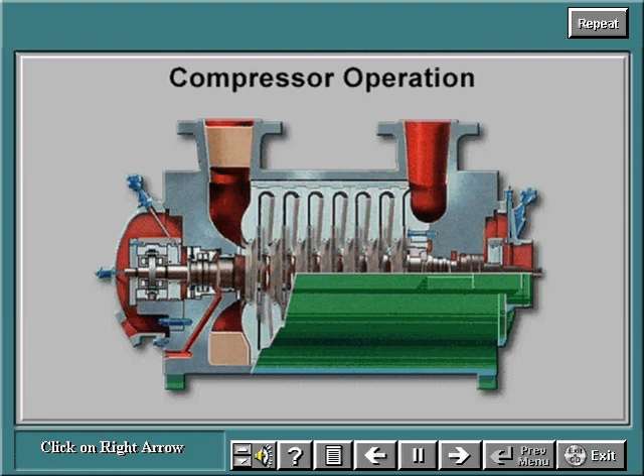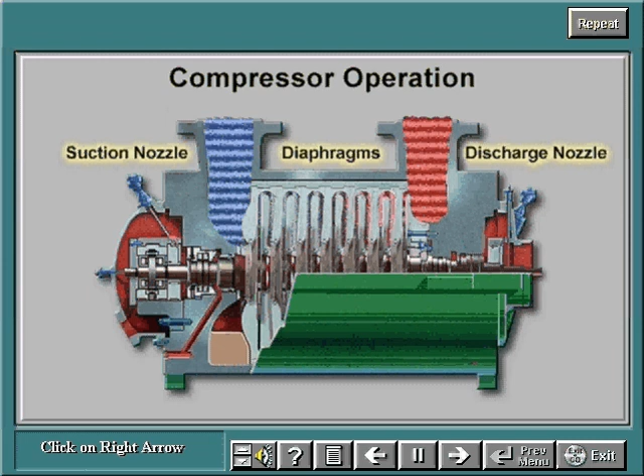In a centrifugal compressor, a continuous flow of fluid increases its pressure by means of energy given by impellers arranged on a rotating shaft. This type of machine is composed of an outer casing, which contains the diaphragms and a rotor. The rotor draws gas from the suction nozzle through the impellers, across the diaphragms to the discharge nozzle located on the opposite end of the compressor.

The major components of a centrifugal compressor can be divided into two functional areas. The first functional area includes the stationary components consisting of the casing, the inlet and discharge nozzles, the inlet and discharge volutes, the inlet, intermediate, and discharge diaphragm sections, the shaft end seals, the journal bearings, and the thrust bearing.

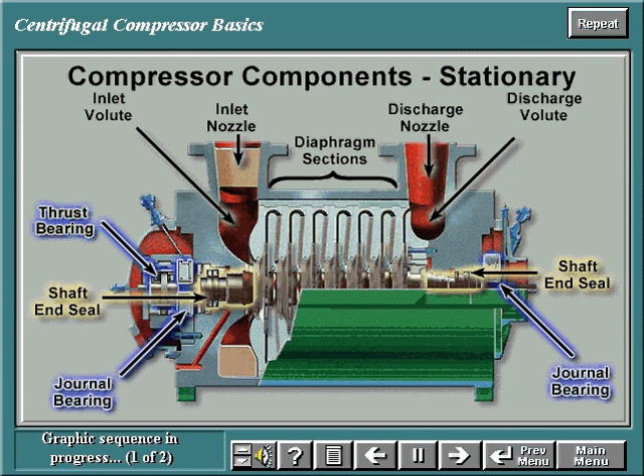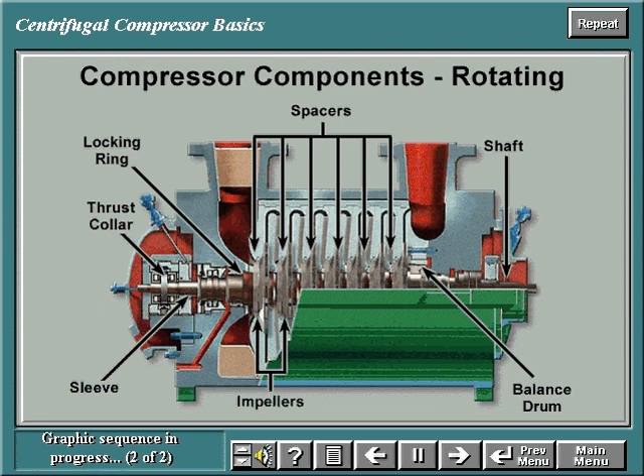The second functional area includes the rotating components consisting of the impellers, the shaft, the balance drum, the spacers, the seal sleeves, the thrust collar, and the locking rings.

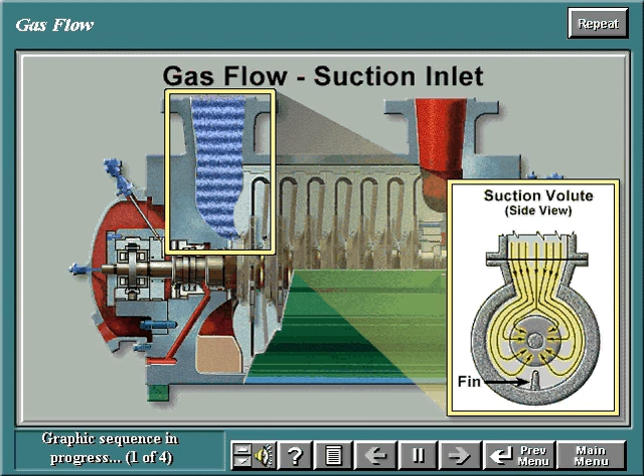Gas flow enters the inlet volute of the compressor through the suction nozzle. The volute ensures uniform distribution of the gas around the eye of the impeller. In the volute, directly opposite the suction nozzle, is a fin that reduces gas turbulence and prevents recirculation within the volute itself. From the inlet volute, the gas is then drawn into the eye of the impeller and is discharged.

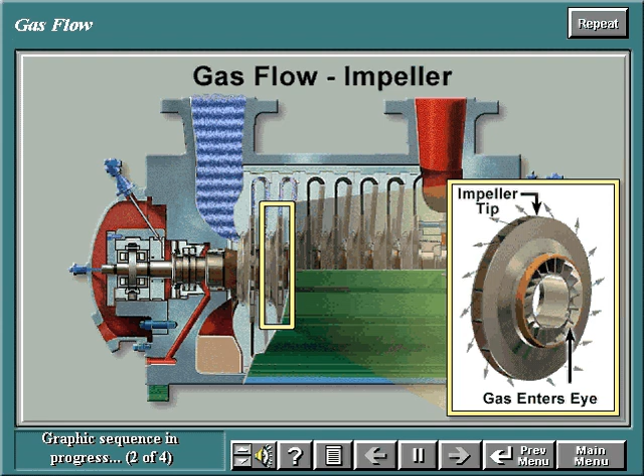Radially at a higher pressure, temperature, and velocity from the tip of the impeller. The impeller contains blades that convert the mechanical energy of the shaft into gas energy. This energy can be measured in terms of pressure, temperature, and velocity.

The high-velocity gas flows from the impeller into the stationary components downstream, whose surface defines a diffuser. In the diffuser, part of the gas velocity is reduced. Following the diffuser is a return channel that brings the gas to the eye of the next impeller.

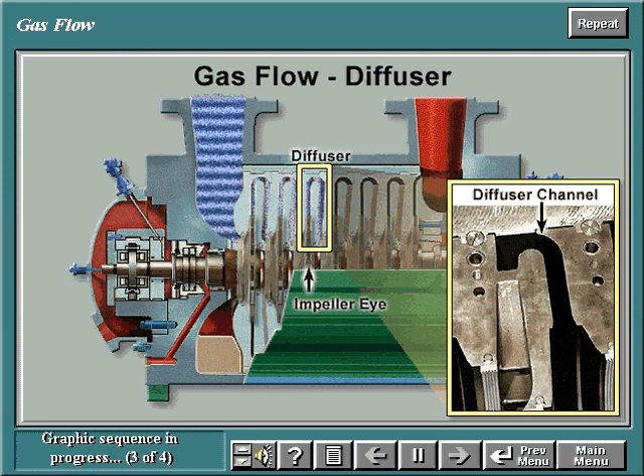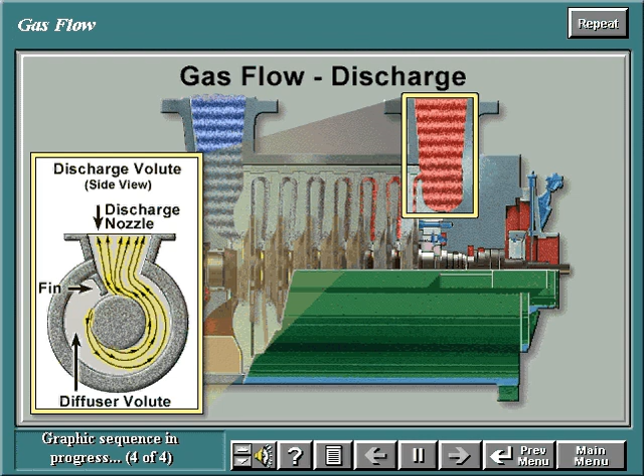Upon leaving the last diffuser, the gas flows into the discharge volute and is directed toward the discharge nozzle. The discharge volute contains a fin, similar to the fin in the inlet volute, that reduces gas turbulence and prevents the gas from continuing to flow around the volute.

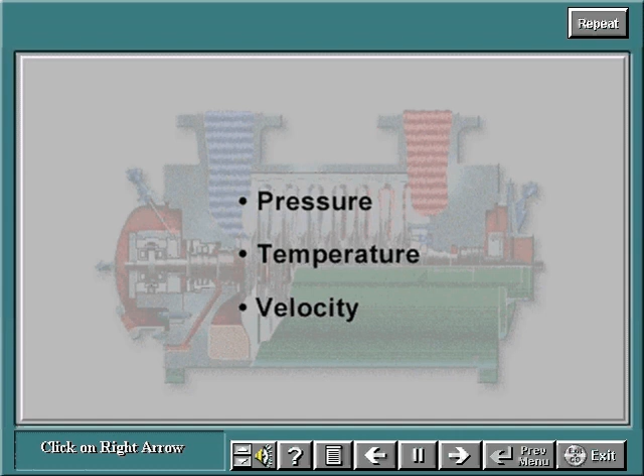The increased energy in a gas is defined by the characteristics of pressure, temperature, and velocity. These three characteristics are used to determine a quantity known as enthalpy. Enthalpy depends only on the condition of the fluid and measurement of the energy content of the gas.

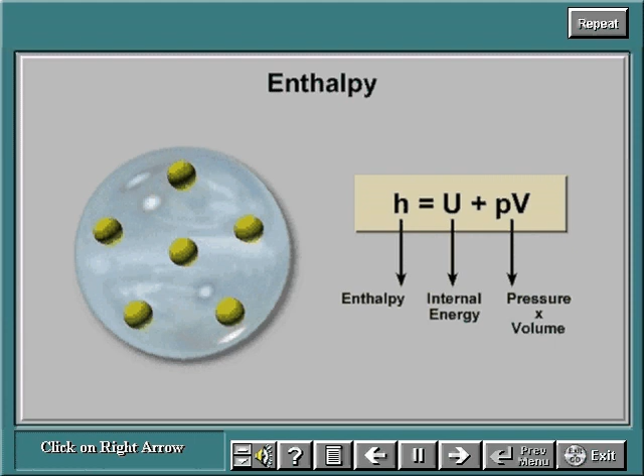Thermodynamic properties of the gas can be static or total. The difference between the two is that the total condition includes the energy content generated by gas velocity. Thermodynamics includes the concepts and laws describing the conversion of energy from one form to another, and the study of how these forms of energy interrelate.

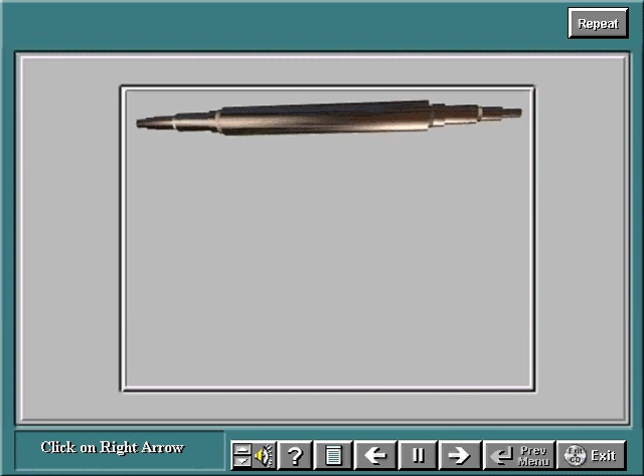The assembly of the rotor begins with the installation of the sleeves to the area of the shaft where the oil seals will make contact. Next, the locking ring is threaded onto the shaft at the balance drum end.

Then, the balance drum is installed and shrink-fitted on the shaft against the locking ring using double keys. Finally, the discharge impeller is installed and shrink-fitted on the shaft against the balance drum using double keys. Then the partial assembly is dynamically balanced.

After the partially assembled rotor has been balanced, a spacer is installed, the next impeller is added, and both are heat shrink fitted to the shaft. Then the rotor assembly is balanced again.

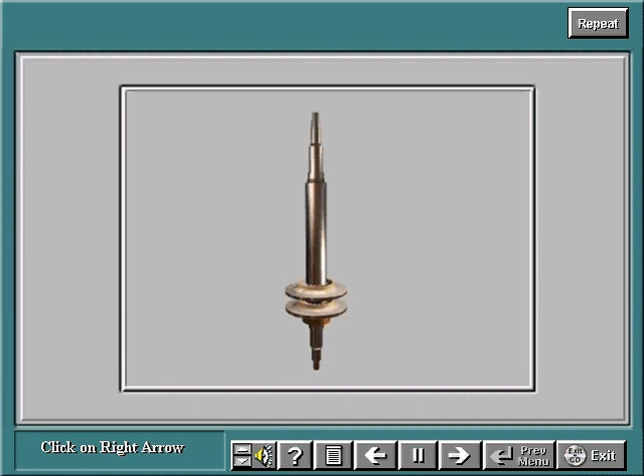The sequence of balancing the rotor, installing the spacer, and adding the impellers is repeated until the suction impeller, spacer, and locking ring are installed and balanced as defined by the customer requirements. Generally, the thrust collar is added last. It is hydraulically expanded and pressed into position on the end of the shaft.

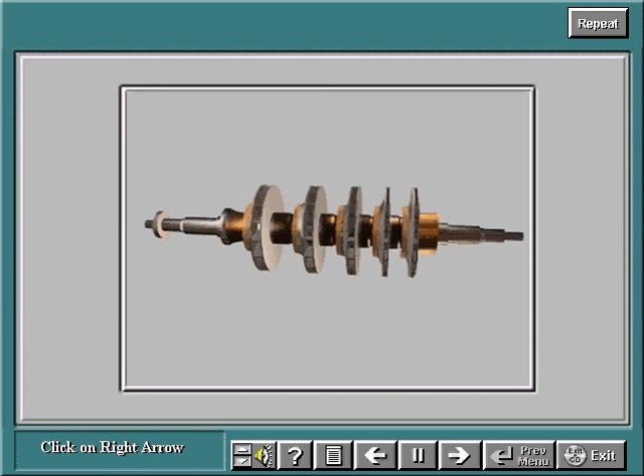The assembly of a BCL compressor begins with the insertion of the diaphragms into the counter casing. Because both the counter casing and diaphragms are horizontally split, each half of the counter casing receives the diaphragm halves. Each half is lowered into place and positioned axially by the counter casing shoulder.

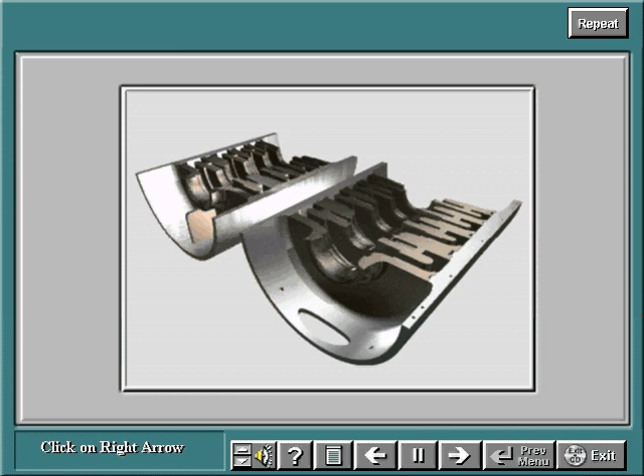The diaphragms in the upper half of the counter casing are locked in place using cap screws so they do not fall out when the upper half of the counter casing is placed on.

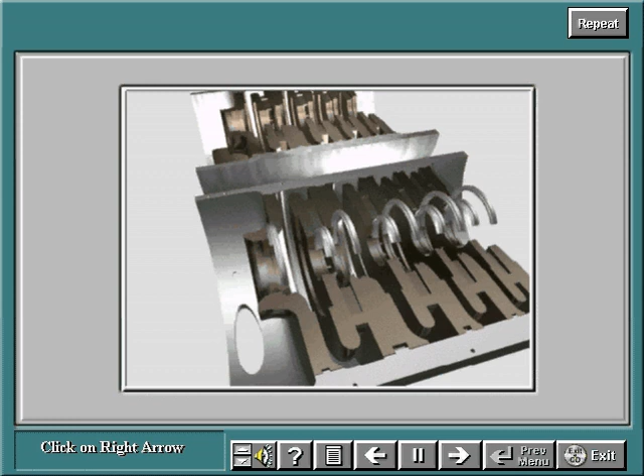After the diaphragm halves have been mounted into the counter casing and placed in position, the labyrinth seals are installed in the diaphragm sections. The labyrinth seal segments for the impeller eye and foot are rolled into L grooves.

The labyrinth seals in the upper half of the counter casing are locked in place using cap screws so they do not fall out when the upper half of the counter casing is placed on the lower half.

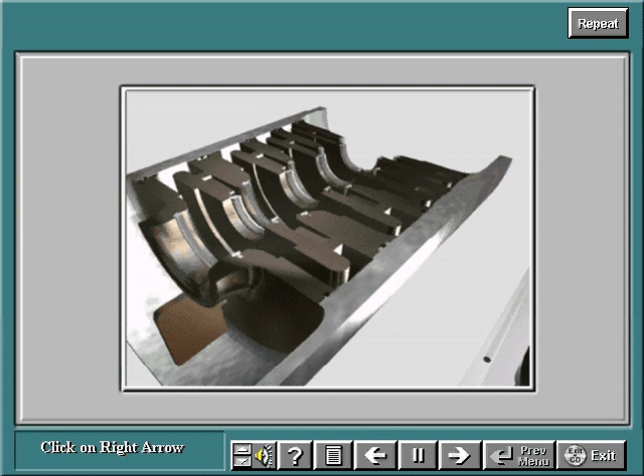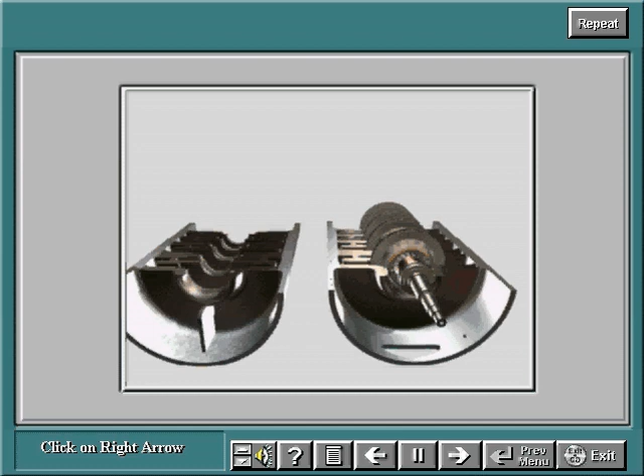The rotor assembly is inserted on the lower half diaphragms and rests on the lower half labyrinth seals. Then the axial position of the rotor is set and recorded.

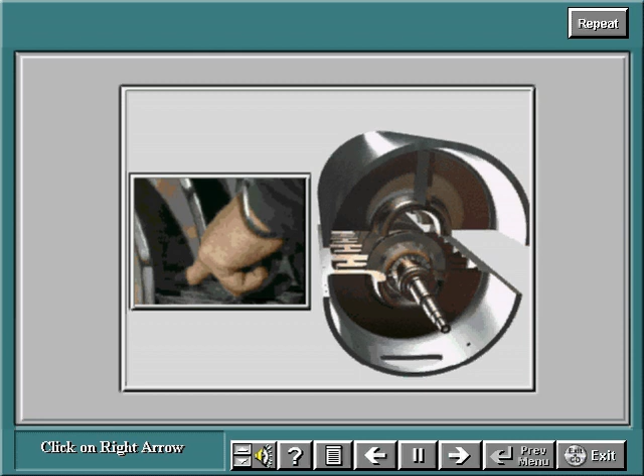Next, the upper half of the counter casing is placed on top of the installed rotor and lower counter casing half. Before closing the counter casing halves together, O-ring segments, coated with lubricating grease, are fitted into position on the middle split plane of the lower diaphragm to minimize leakage between compression stages.

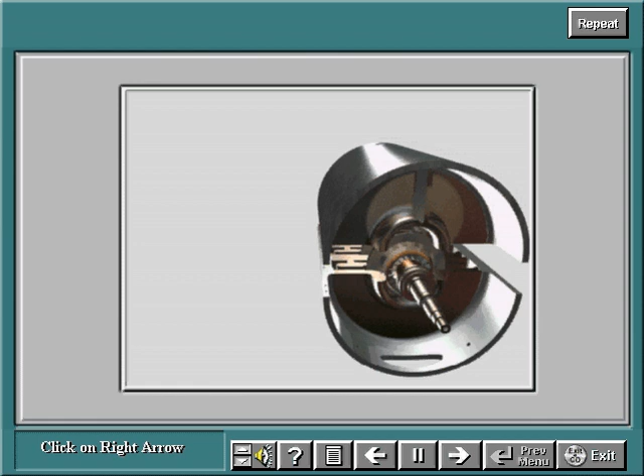Great care must be taken to ensure a perfect fit between the two halves to avoid internal damage to the rotor and diaphragm.